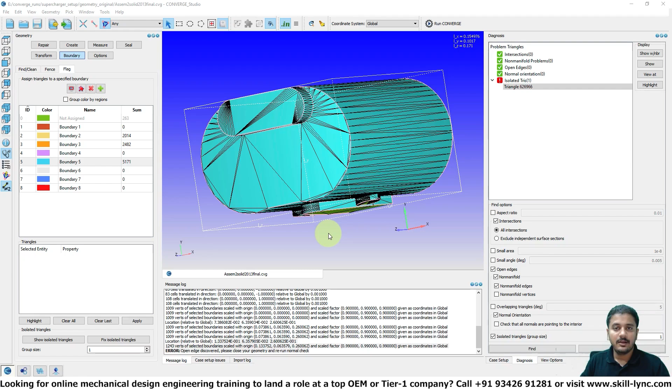Now, a couple of corrections. I accidentally told you that this is a screw-type supercharger. It's actually what you call a Roots-type supercharger.

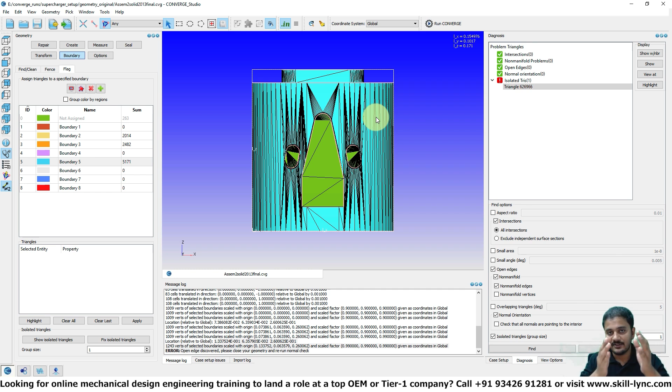So the idea is that along this taper, the air gets compressed as the screws rotate, because it's a positive displacement machine. The air is moved, and since the available volume for the air is getting reduced, it gets pressurized. On the other hand, on the Roots blower type, you don't have any taper.

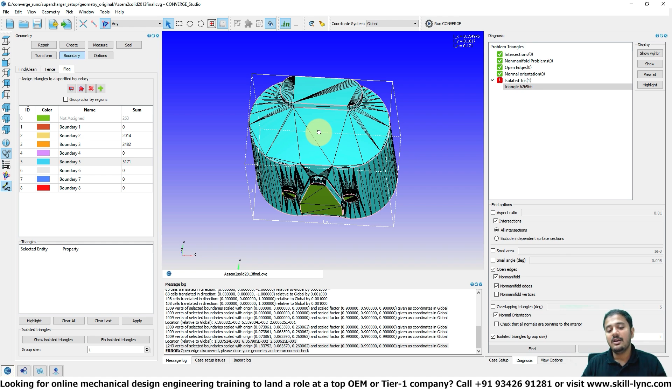You can see that here quite clearly. So the idea is the air basically gets sucked in from the top, and as the lobes rotate, it just gets pushed sideways, and that air gets stacked towards the bottom, thereby pressurizing it.

Alright, so what we're going to do now is flag the inlets and outlets. I'm going to select the angle method, select this guy and assign it to a new boundary. Then we're going to select this guy and call this the outlet. Now, these two parts are going to go back to the casing itself.

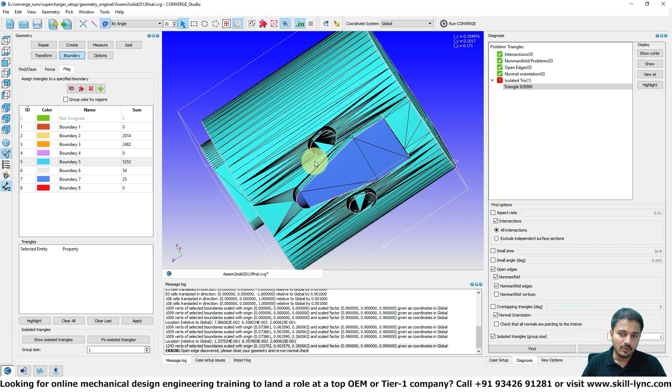So I'm just going to click apply. Alright, now we don't want our outlet to be too close. In reality, this supercharger unit is going to be sitting on some type of intercooler, right? Because compressed air is hot, and you want to cool this hot air before it enters the engine.

And since we don't have that geometry, what I'm going to do is manually push the outflow boundary a little bit farther away. Is this correct? Well, it's not, but it's not a big deal, because if you were actually working on a realistic supercharger, you'd have the outlet at the right portion, so you wouldn't have to make any guesses.

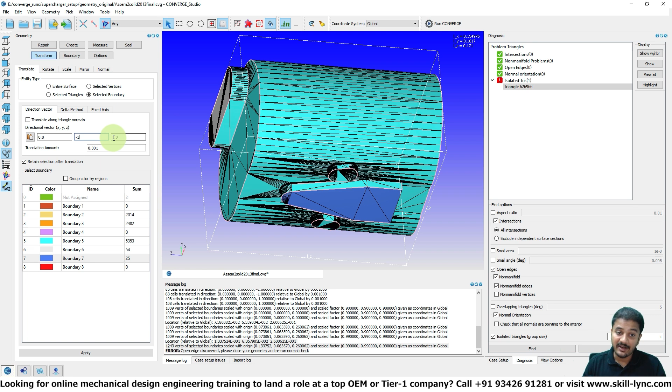So in my case, I'm just going to translate the selected boundary, select this guy, and translate it along the minus y direction. Let's start by moving this by 5mm to see if it looks right. 10, 15, 20, 25, 30, 35, 40. Alright, so that's, I think, a good starting point.

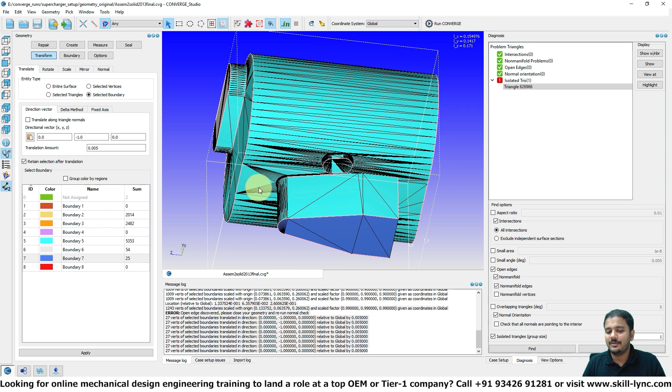This portion of the geometry is usually available if you're working for an OEM or consulting for an OEM. So this shape isn't super realistic, but that's not a big deal because the shape doesn't matter in our case. Alright, so I think that looks good.

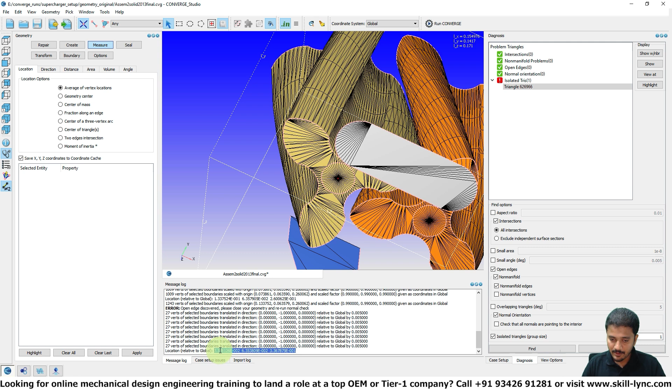So the next thing I want to do is, you can see that the origin is kind of out there, right? So I want to center the origin maybe on this particular point. What I'm going to do is measure location, select this particular vertex, click apply, and take this point. This is basically the location of this point with respect to this particular origin.

So I'm going to transform, but this time I'm going to use something called the delta method. I'm just going to put the copied coordinates here. Now what I want to do is translate my geometry. This point is basically...

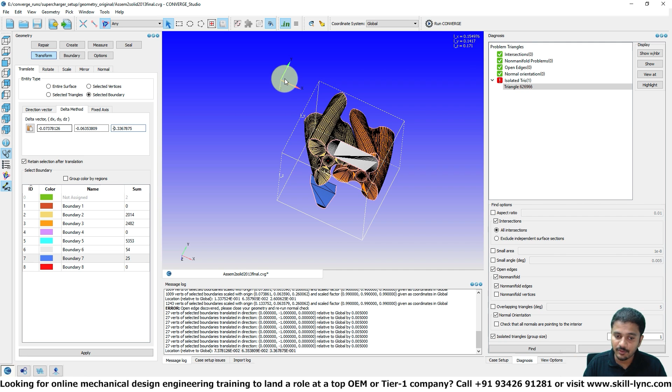0.0737 meters away from the x-axis. So if I push this point by this distance in the negative x direction, then I should move it towards the left, correct? So if I put a negative sign here, it's going to make sure that the x-coordinate of that red point is 0. If I do the same thing for all of them, then essentially I'm moving this red point to the origin. So let's make sure the entire surface is selected, and let's click apply.

There you go. So now you can see that the entire geometry has been shifted. Why did I do that? Well, this actually helps me provide the rotating boundary conditions very easily.

Now for this particular lobe, we know that the rotation axis is the z-axis and the rotation center is 0, 0, 0. And if I measure this guy, ideally you'll see that you just have an offset along the x-axis, right?

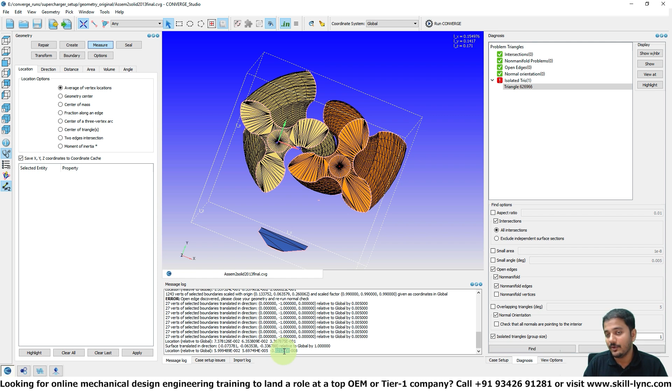You can see that along the x-axis there's an offset, that is the lobe to lobe distance, and pretty much the y and z components are like 0, this is a very small number. So this helps us in assigning our boundary conditions with ease.

So what's next? Well, the next thing is to basically assign the boundary conditions for our lobes and apply the pressure conditions for the inlets and outlets. So where do these data come from?

Well, you usually get them from something called a performance curve. Typically for a supercharger, when it's rotating at a particular RPM, it basically delivers a given mass flow rate for a given pressure ratio. So the idea is that depending upon the RPM, the mass flow rate, and the pressure, you have a particular efficiency for the supercharger, and the idea is to basically have all these details when you're starting to simulate.

Now as far as the CFD engineer or CFD analyst is concerned, the only thing you need to be worried about is choosing a point that is still inside this performance map. Oftentimes you might be playing with a supercharger case setup and using a boundary condition or operating point that is completely not realistic. In those cases you will definitely get wrong results. So from a CFD analyst point of view, you need to make sure you get your hands on this performance data so you can be sure you're setting up the simulation for the right conditions.

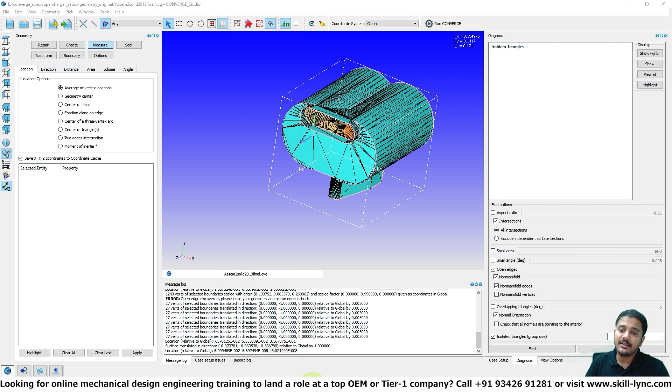So in our case, what we are going to do is go for a pressure ratio of 2.0, which means the ratio of the outlet to the inlet pressure is going to be 2.0. So at the inlet, if the pressure is 1 bar, the pressure is going to be 2 bar at the outlet. And in our case, the rotor is basically rotating at 36,000 RPM.

So 36,000 RPM is nothing but 36,000 divided by 60 RPS, rotations per second, since 1 minute is 60 seconds. Then you convert this rotations per second into degrees per second. Now one rotation is 360 degrees, so you take your original RPM, multiply that by 360, and divide by 60. Now 360 by 60 is equal to 6, so the only thing you're left with is 36,000 times 6, which is 216,000. So this is going to be the speed at which the lobes are rotating.

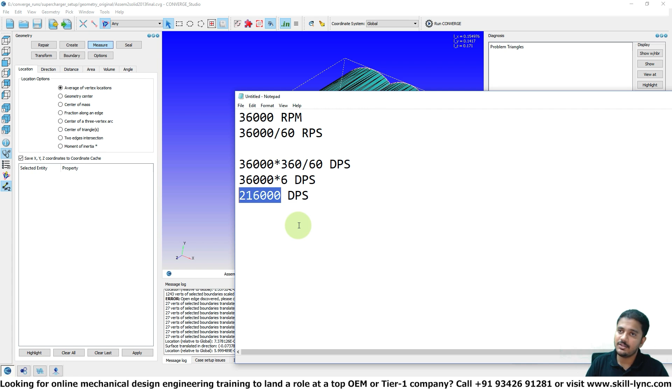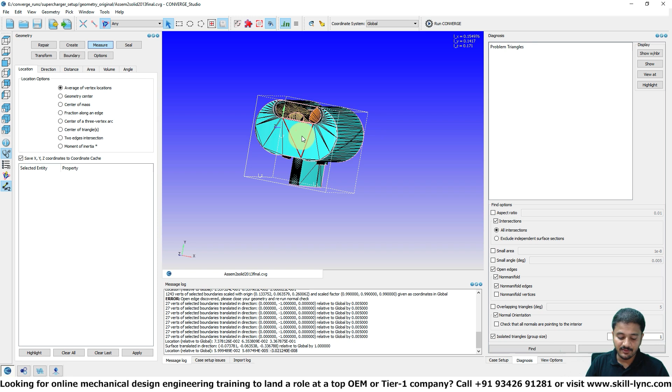Alright, so the next thing you need to understand is the direction of rotation. We definitely know that the lobes should be rotating in opposite directions, but you still have two ways to do that. The idea is once the air comes in, we want to push it towards the outer wall and then bring it towards the outlet from the downside. So in other words, if I hide this guy, this orange rotor should be rotating clockwise and the yellow rotor should be rotating in the anti-clockwise direction. Alright, so that's basically it.

So let's go ahead and set up the case. I'm going to start with begin case setup, click on general flow, click on apply and done. And then in this case, I'm just going to have air as my material.

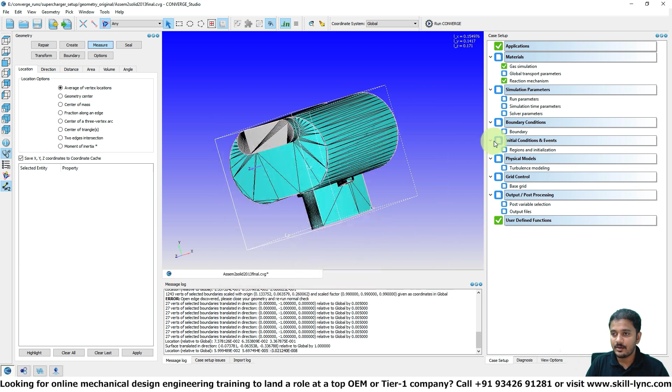Alright, and then what I'm going to do is click on run parameters. We are going to be doing a transient simulation because the lobes are rotating. So let's click OK. And as far as the simulation parameters, we want to make sure we run this for at least a few rotations.

So how do we go about that? Well, this is basically rotations per second. So if you take this RPS, this is saying you have 600 rotations per second, I think I did the math right. So 600 into 60, that's going to be 36,000. Now, how do we calculate the time per one rotation? Well, if you have 600 rotations in 1 second, then the time taken for one rotation is going to be 1 divided by 600, that is basically seconds per rotation.

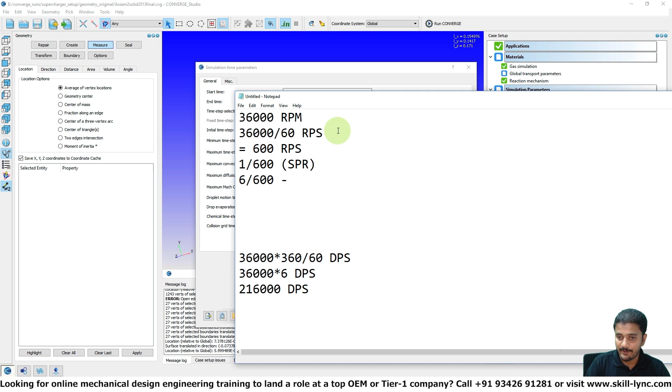So for one rotation, if it takes this much time, then for 6 rotations, we are going to be taking 6 divided by 600, correct? So that's 1 divided by 100, which is 0.01. So whenever you calculate run parameters, make sure that you apply some kind of logic. So 0.01, I believe that is correct.

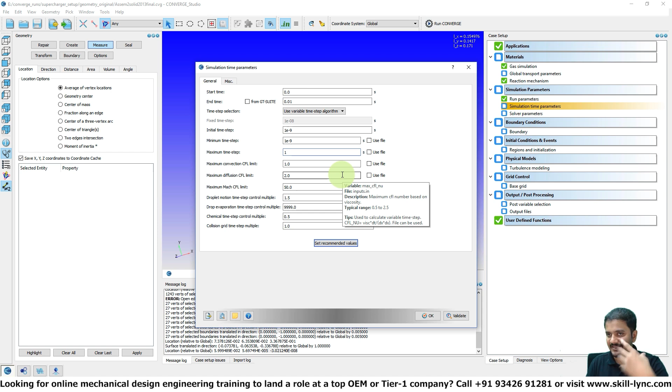I'm going to say that the start time is 0. We want the initial time step to be 1e-9, and we want the minimum time step to also be 1e-9. Maximum time step can go up to 1 second, but it never does in these type of simulations. Since Converge is going to be using a dynamic time step algorithm, it's automatically going to march towards the highest possible time step.

So let's click on validate and click OK. As far as the solver parameters, we typically don't touch this unless we have some type of convergence issues.

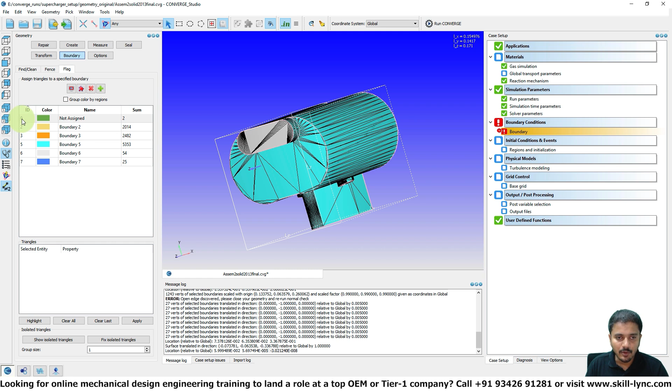So now we are ready to assign the boundary conditions. But before we do that, I think it might be an idea to just clean up some of the unused boundaries. So I'm going to select this and delete these unused boundaries. You can see that there are 2 triangles in boundary ID 0, so that needs to be fixed. But before I do that, I'm just going to name the parts.

So this is going to be the left lobe, and this is going to be the right lobe. And what else is there? Well, this is your casing, so I'm just going to call it casing, and this one right here is the inlet, and this one right here is the outlet.

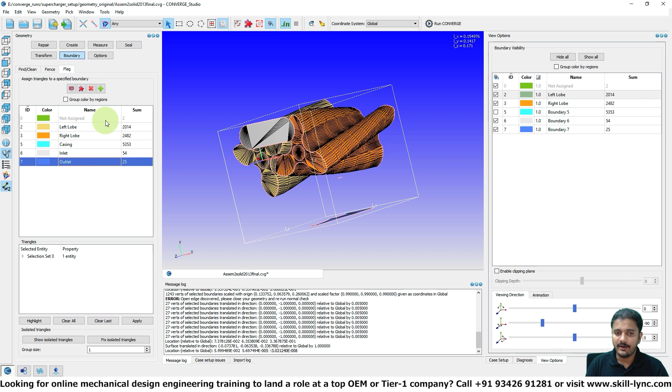Alright, so let's figure out where these two guys are. I'm going to enable these two boundaries, and let us see. Okay, that seems like a very small triangle, and I think it has to be with the casing, right? So there are a couple of ways to do this. One thing is to just go to isolated triangles, make sure that the group size is 2, and then click on fix isolated triangles. When you do that, the number of triangles in the not assigned boundary automatically becomes 0.

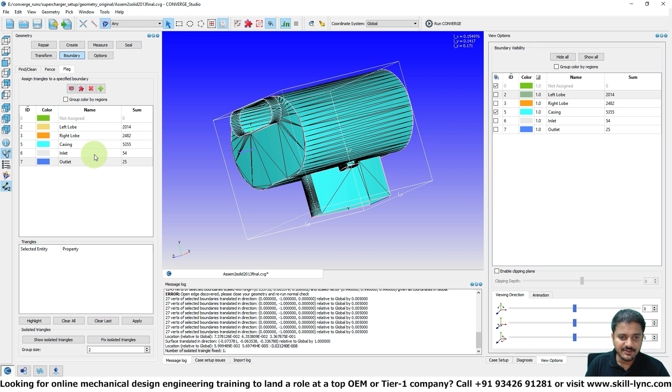So this is perfect. Let's get started. At the inlet, what I'm going to do is say that we are providing an inflow boundary condition, and the pressure there is 101325, or I can just give this as 1 bar. Ideally I would need some kind of measurement data here, so in this case I'm just going to go with 1 bar, and we are going to be using a temperature of 300 Kelvin, and air is our fluid.

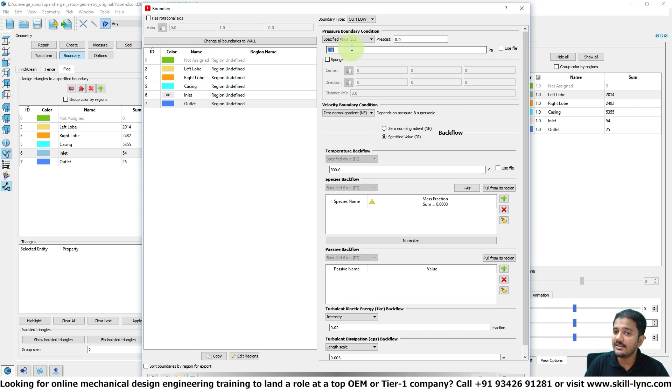And at the outlet, what I'm going to do is say that we have the outflow boundary condition, and the static pressure there is 2 bar. Again, I cannot insist enough on the importance of getting these boundary conditions correctly, and they need to be consistent with the RPM that you have selected. In this case, there will not be a backflow, but if there is, we just have to make sure that air is going to be the fluid that returns at 300 Kelvin.

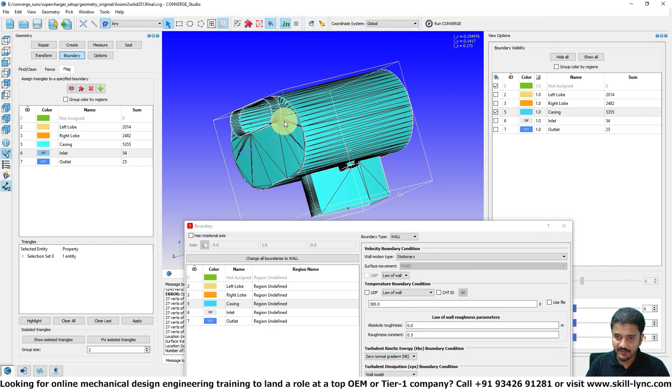And if you take the casing, we are just going to apply the wall boundary condition. Alright, so let's just hide the casing here so that we can look at everything.

So for the right lobe, what we are going to do is say that it's a wall, and it is a rotating wall. The rotation rate in degrees per second, right? So I'm just going to copy that, and I'm going to paste it here.

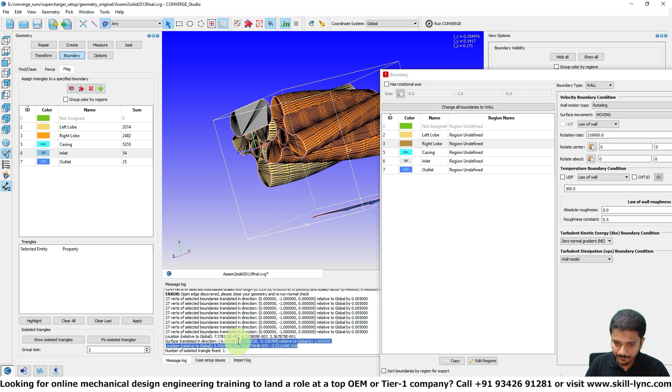And then for the rotation center, I'm just going to copy this, and paste it here. So that's going to be my rotation center. And the rotation axis, so this is where you need to be careful. We want this to be rotating in clockwise direction. The orange lobe, we want that to be rotating in clockwise direction. So if you rotate it about the z-axis, Converge is going to use the right hand thumb rule, which means the lobe will actually rotate in anti-clockwise direction.

You don't want that, so what you can do is put a negative sign here. Alternatively, you can put a negative sign in the RPM as well, but I typically like to do that in the axis. Alright, so that looks good.

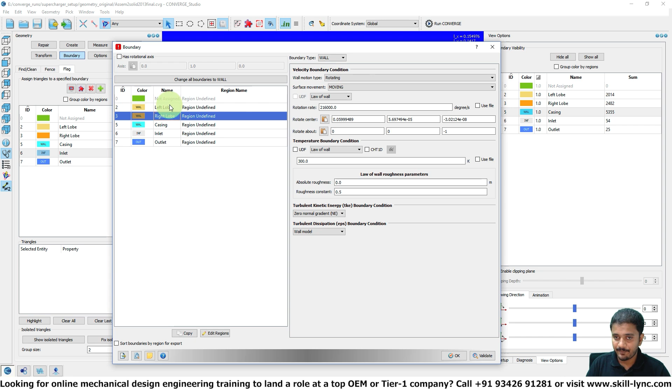Let's go back to the case setup, and we're going to add a region. In this case, we just need one region. I'm going to add air as the working fluid. Validate and click OK. Now we go back to boundary, and I'm just going to say that everything belongs to region 0.

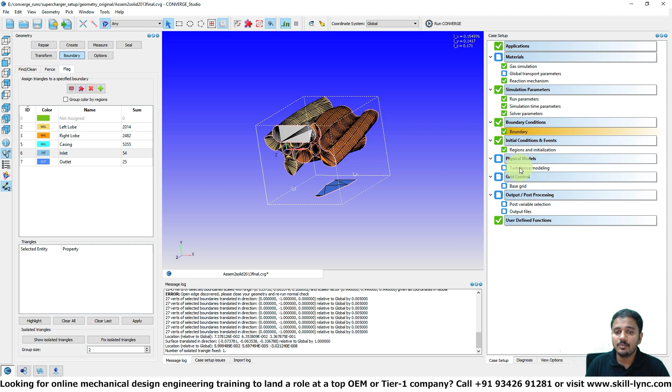For turbulence modeling, what we are going to do is start with RNG K epsilon. Click on validate and click OK.

As far as the base grid is concerned, we are initially interested in just getting a coarse simulation because we want to make sure that the setup runs perfectly. Let's redisplay everything. What I'm going to do is measure the cell count for a given base grid, so we'll start with 4 mm.

It basically says that the total cell count is about 33,000. Now this assumes that you have a perfect cuboidal shaped geometry, right? This is just an estimation. So in our case, we can go to maybe a 2 mm base grid to see what happens.

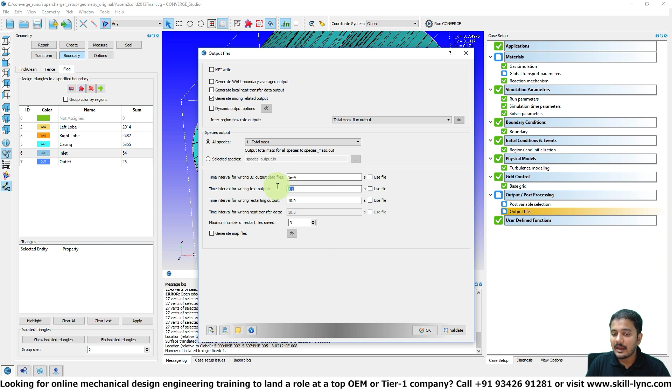As far as the output files are concerned, we need to make sure that we are getting, so it's 1e-2 seconds, which means in order to get 100 output files, this needs to be 1e-4. And what I'm going to do is write a restart file every 5e-4 seconds, so in case the simulation crashes, we might be able to restart it from that crash point itself. Let's click on validate, and let's click on OK.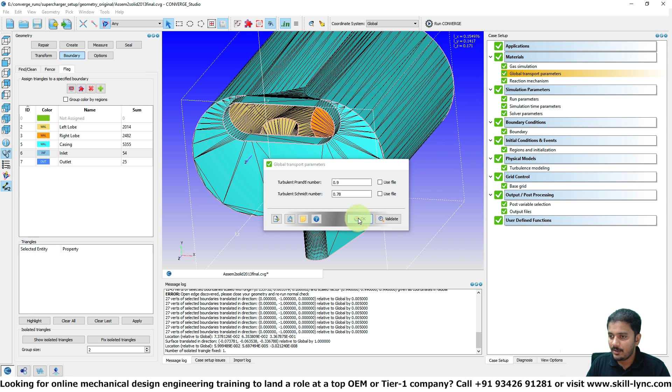Post variable selection, nothing fancy is required at this point. Global transport parameters, nothing to be done there as well. So with that, our setup is complete.

The first thing that I want to do is run a no hydrodynamic solver, so that if there are any issues with the mesh motion, we can actually capture it.

Let me check the normal direction, and clearly the normals are all incorrect. So I'm going to transform the normals, click on attempt to fix all normals, and click apply. There you go, that has fixed it.

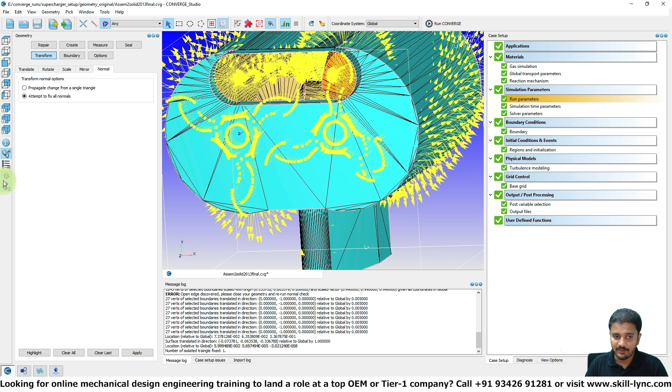We're ready to export all our input files. I'm just going to go back to my supercharger setup folder. I'm going to create a folder called base setup, and inside that we are going to select folder, click on OK, and export everything.

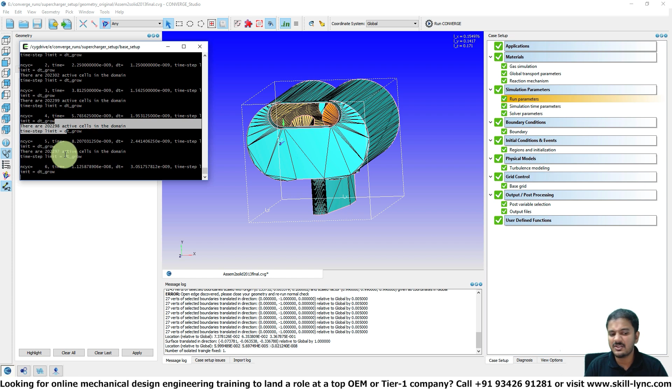Then let's open up Converge, and we're going to go to the supercharger setup, go to the base setup folder, and I'm just going to run Converge to see if it actually runs through. Here you can see that the time steps are starting to grow, and you are having about 200,000 cells, which is much more than I anticipated, but that's fine.

What I'm going to do is let this run, and if it crashes, that means that as the lobes are rotating, they're intersecting somewhere. If it is not crashing, we know that our boundary conditions have been set up correctly, and then we can move on to the next step. So I'm going to pause the video right now, and I'll continue.